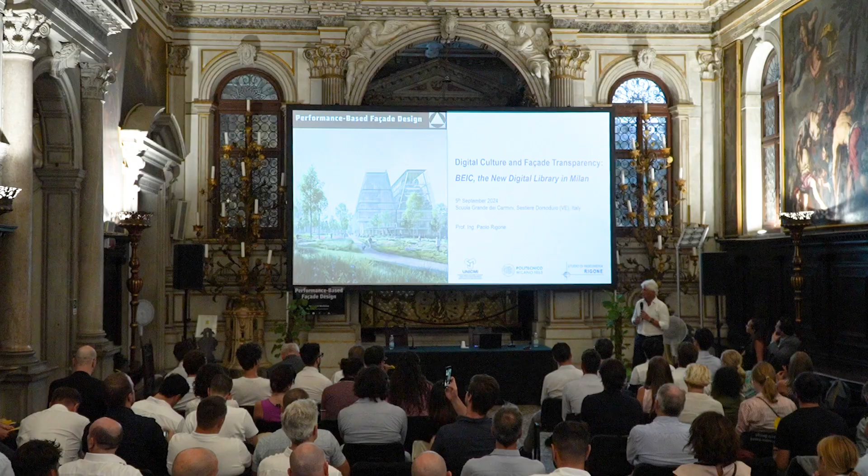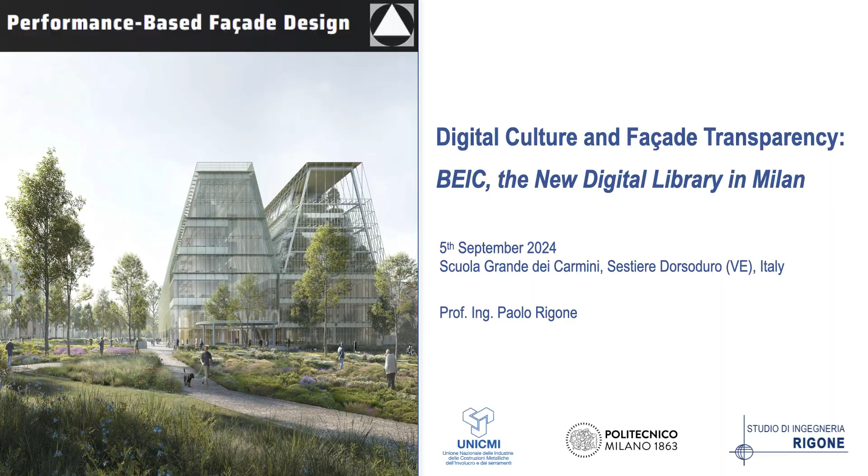My presentation deals with a new project in Milano, but I will not present it directly through the architecture, just more regarding the engineering approach. The general concept is, again, transparency. Transparency means many things in terms of architecture, of feeling the architecture, but from an engineering point of view of the facade, transparency is normally quite a big complication in the design. So we will see some issues.

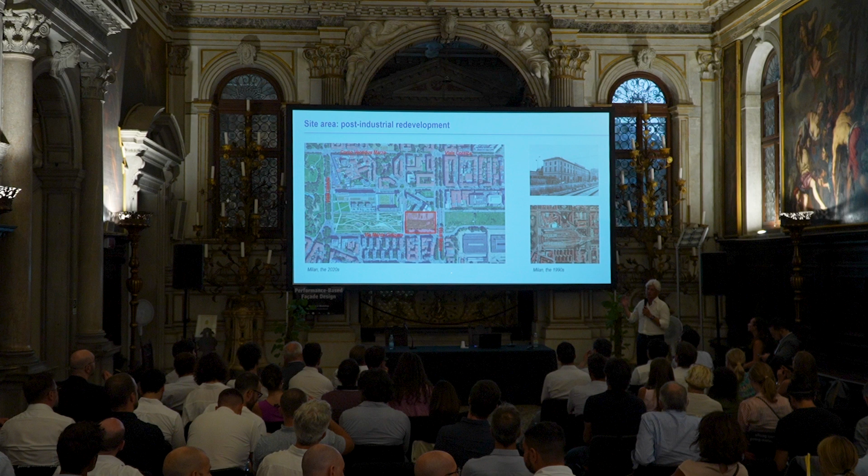So, very fast, the introduction of this new building. As you have seen, it is a new library, the new European library in Milano dealing with information and culture. The building is currently under construction, and it is placed in an area of Milano under refurbishment, one of the most important large areas of Milano, considering that in this area there was before a historical railway station, as you can see from the picture.

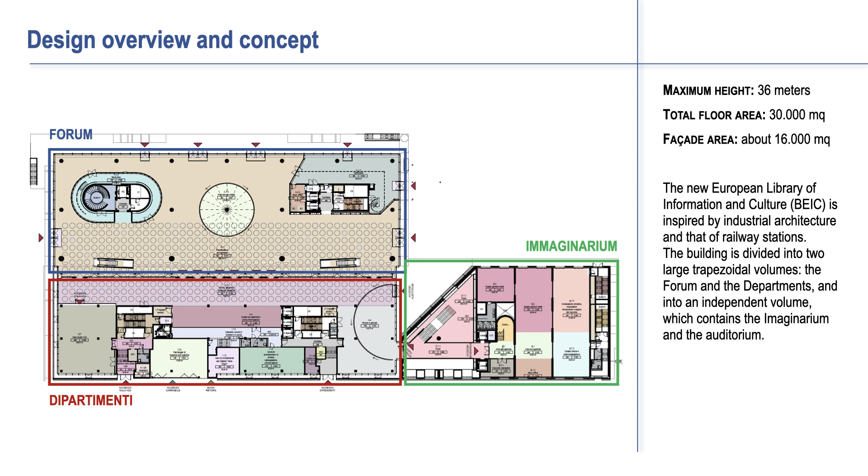So very quickly, this is the plan of the building. You see that it's divided into different parts or components, like departments, the forum area and the imaginarium area, which is mainly at the ground floor. Underground there is the largest part of the building, which is dedicated to storing most of the library information and books.

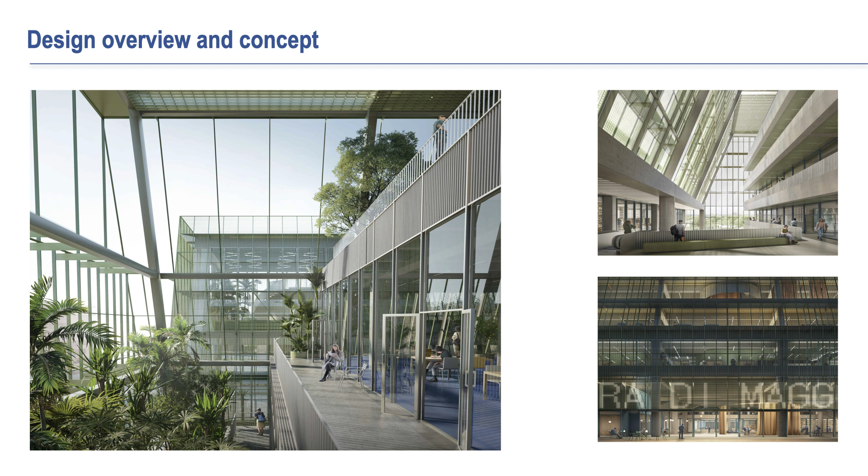This is a rendering of the aim of the transparency of the building. As you see, the building is highlighting the transparency, which is concerned with information and culture, something which sounds like transparency of the knowledge that we can have through the library. As you can see from the rendering, transparency means a very light construction, the structure, but a very light facade too. So mainly glass everywhere, dealing not only with the facade directly, but also with the roof.

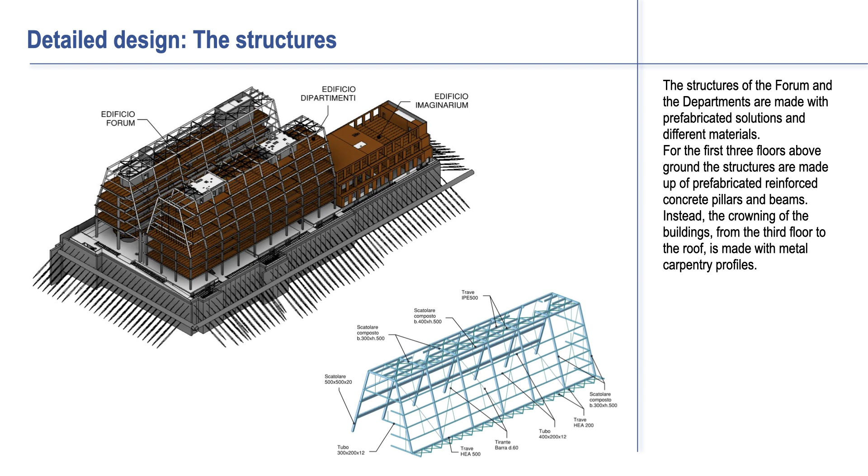This is something dealing with the structure. I will not go through the structure, but only explain the complexity of matching the facade construction with the structure of the building. The structure of the building is a mixture of a concrete structure, which is mainly underground, and a typical steel structure on the ground floor and the top of the building. As you see here from the picture, the spanning of the structure is quite complex and very high.

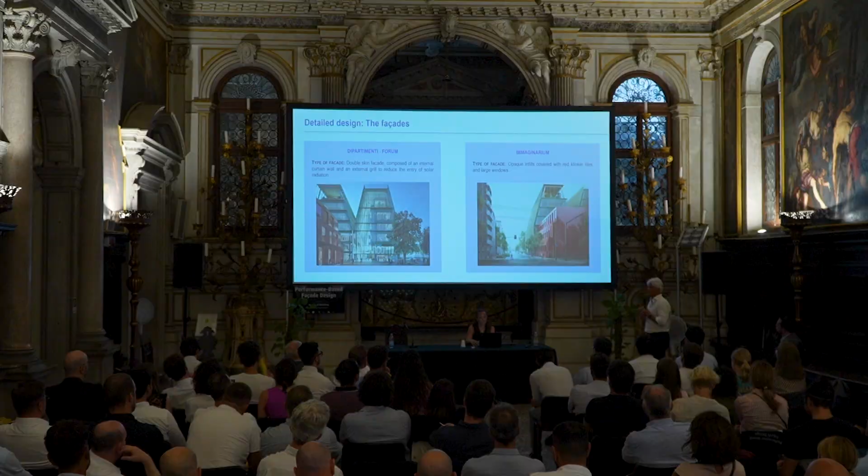So we have to match the facade structure with the building structure. That is a problem which regards the detailed design developed by the architect, by the consultant, and also what is under construction. Today, within the audience, there are a couple of colleagues working directly on this project, on the side of the construction detail design. So we move from the architectural approach directly to the curtain walling construction.

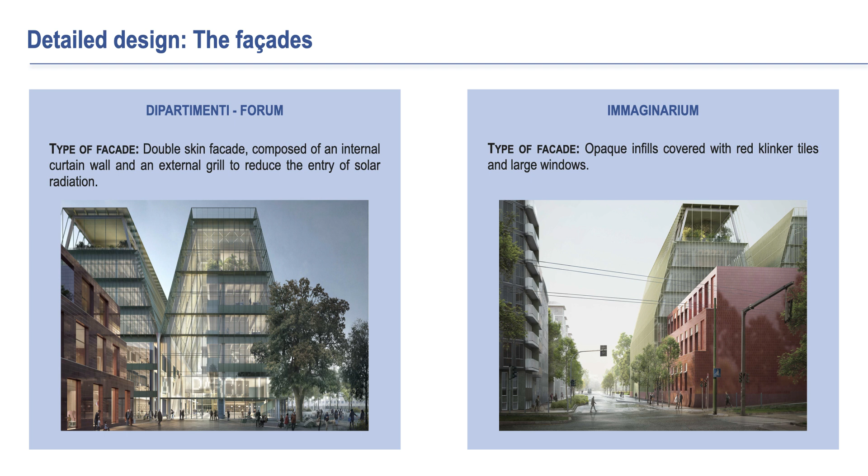In this case, the building is designed with double skin facades, not everywhere, but mainly on the fronts of the building. The system studied in the detailed design is a typical stick system approach, connected mainly to a steel structure. Here you see some very short details about the facade system. It is a typical double skin facade with a metal deck in the middle for maintenance access. And then we have an outer screen, made mainly of grill panels that provide shade to the very high transparent facade behind.

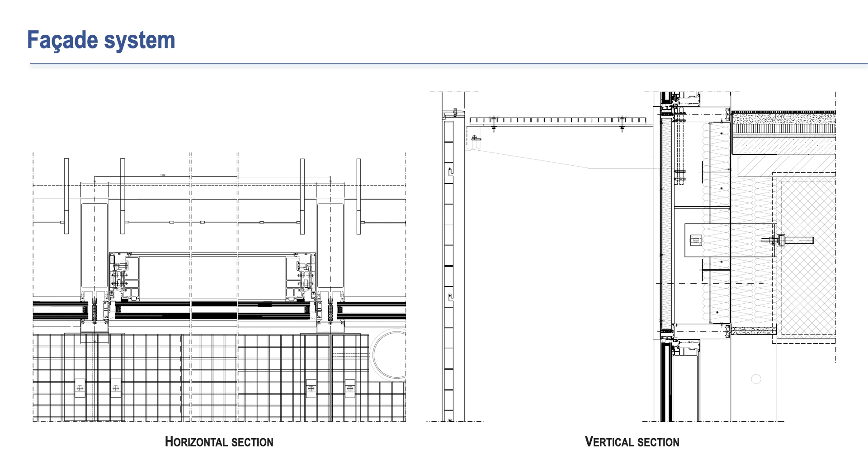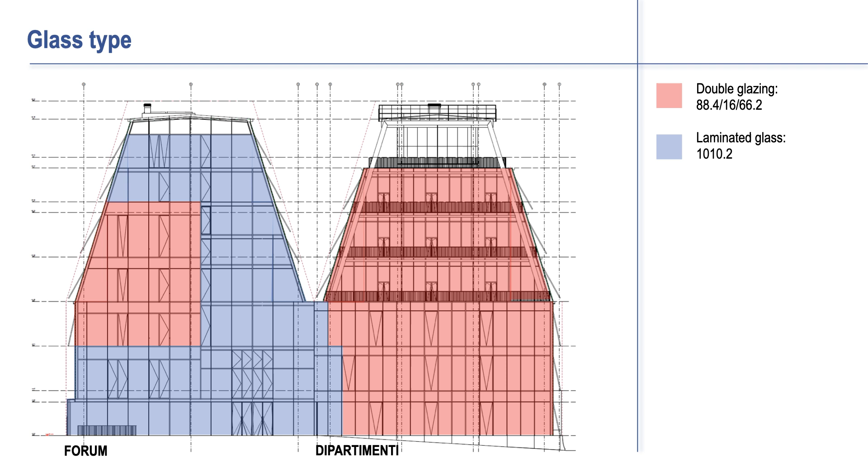Where is the problem regarding this building? It is the problem of the compatibility between the structure and the facade. At the beginning, it could seem nothing very complicated because we are speaking about a stick system, something very well known. Maybe we can go to the next one. And we know that we have performances, nevertheless, that must be assured. We speak about energy performance, acoustic performance, but particularly environmental performances, in terms of air permeability, water tightness, safety in use.

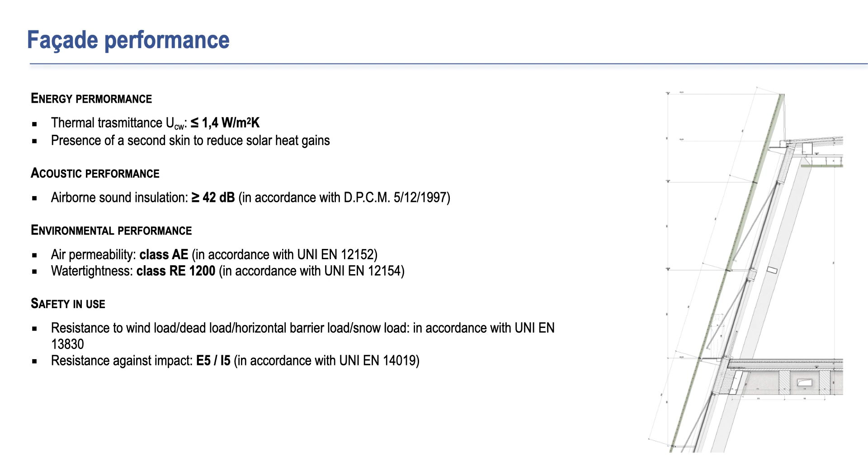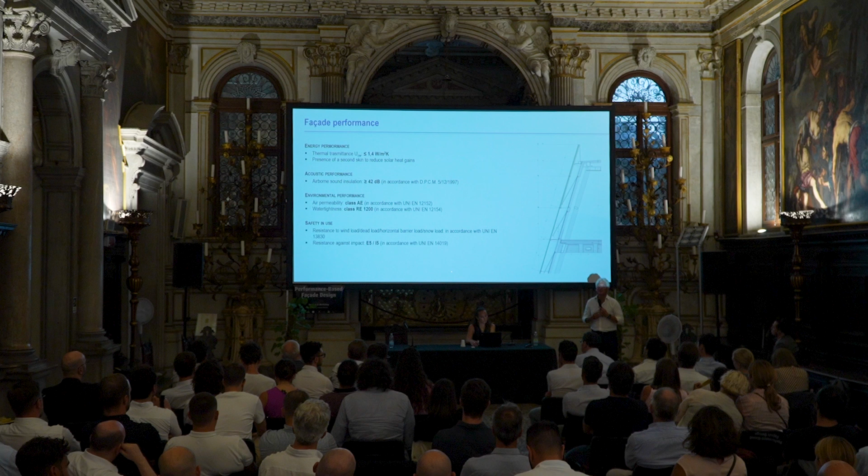And everything is connected to standards at the end. So due to the fact that we, of course, overall work in the European markets, we have some standards, and the leading standard is the product standard EN 13830, which is, let's say, our master standard regarding facades.

So what are the problems with these projects? We have a geometry of the facade. As you have seen, the facade is inclined. So the first question is: is it still a facade or something which is becoming a roof? Well, if we look at the product standard for facades, it stops at 15 degrees of inclination. So everything which is sloping more than 15 is no longer a facade.

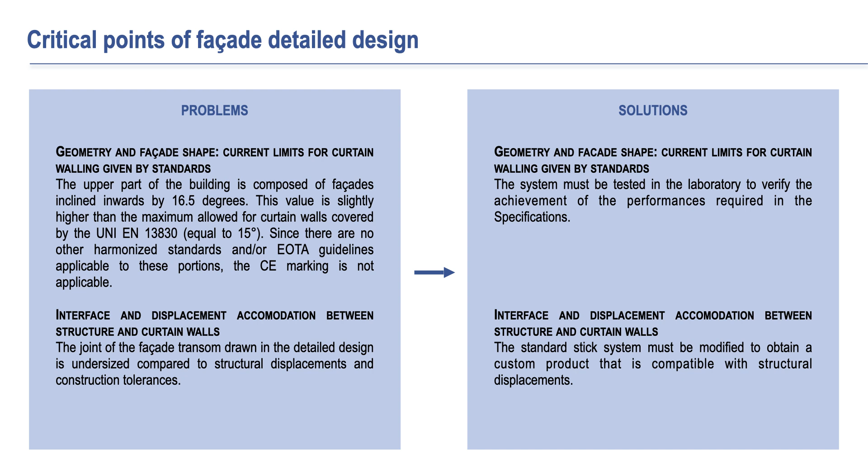But nevertheless, we have the same construction system for the facade from the vertical to the sloped area. So normally there is a problem regarding Europe for the CE marking of the product, which comes out of the application of the standard directly. But nevertheless, we have, let's say, performances that need to be assessed by the facade. And the other topic is the interface that we have between the structure and the facade itself.

So here you see just the approach given to the project. It started from basically a commercial system for the facade, a stick system that we generally know very well. We know that for stick systems, and also for other kinds of facades, we have some geometries that must be respected. Particularly, as you see on the top left, we have the glass bite. The glass bite is something which is dominant in terms of the performance of the facade.

But what we have here in this case, as you see on the right side, are large construction tolerances and displacements. So what is the risk when we move from the approach that we have on the left to find exactly the solution? Normally the risk is that we have no more allowance between the structure of the facade, the glass units, and what is expected as interference with the structural deflections or displacements of the building.

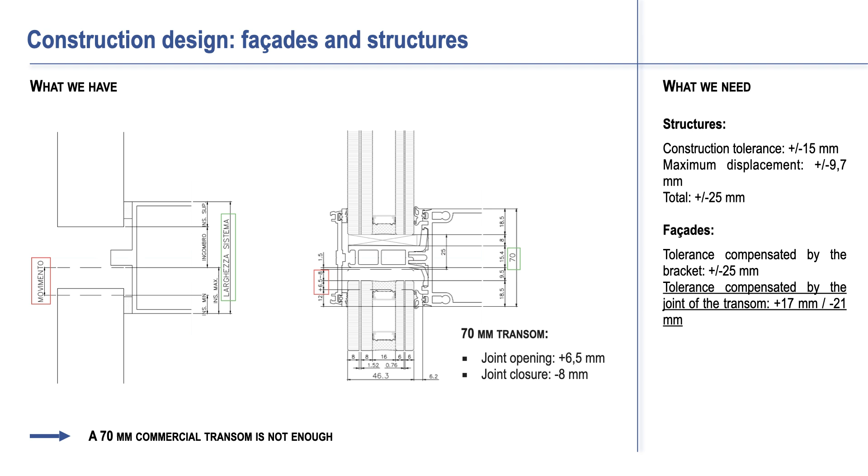So this is a typical problem which normally comes out when we look so much to transparency, so large glass units, and we also look for a very, very light structure. So of course, this is what we have on the right side. That is the typical approach that we have to the problem.

And we know that standards are able to define displacements expected, not for the structure, but for the facade frame in terms of wind load resistance or horizontal live loads. We know that we have standards able to fix displacement limits that are given to assure that the facade is able to maintain performances like air permeability and water tightness under serviceability.

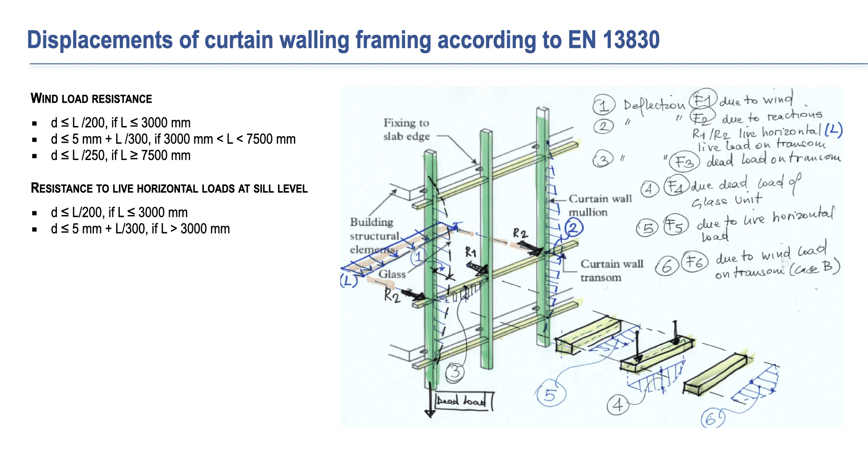But as we said, here we are moving from a typical standard system to something which is customized, even if the original idea is to move from a system selected on the basis of commercial data, because of course the project also needs to answer to a cost limit due to the fact that this is a public building. So what it means in terms of construction is that we have a standard stick system with a dominant system width, and we have to move to something different, a system which is able to allow the different displacement between the structure and the glass units. And this is what we see on the right.

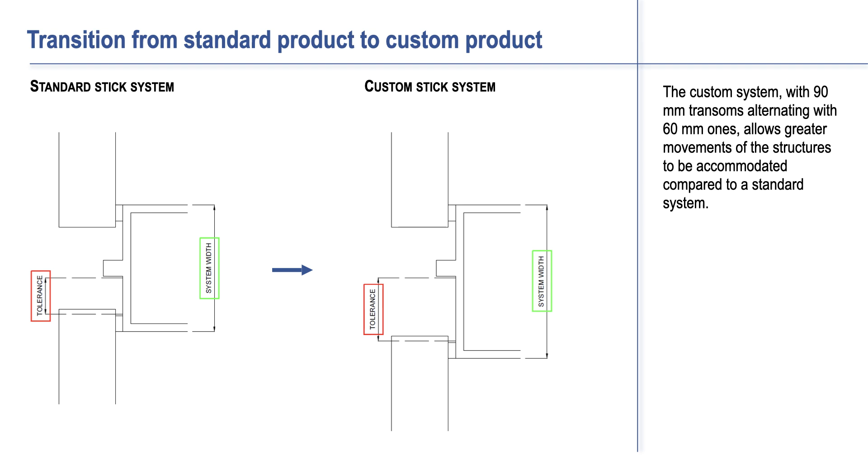So of course I cannot present you everything because the project is under development, but just to explain to you the passage from what is in the original design to what is in the construction, as you see here.

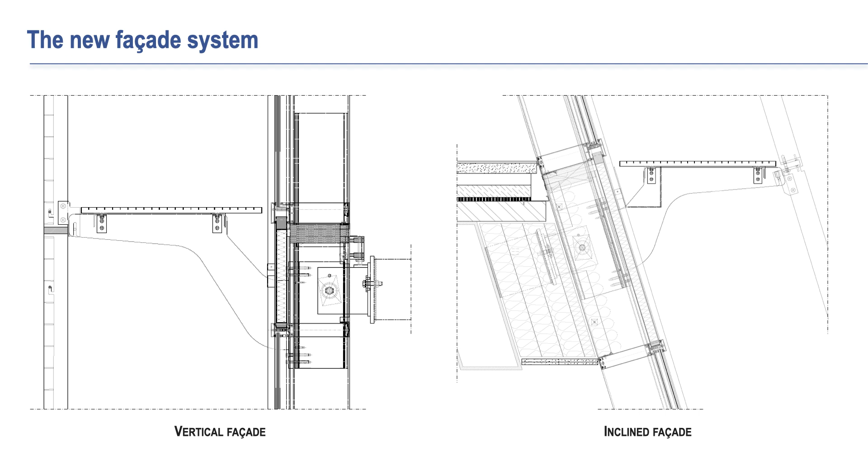What is the difficulty here that we also need to carry? It is the passage from the vertical facade to the inclined one. Because again, all the performance tests that we can have with a stick system which is already certified are valid for the CE marking only on the vertical, up to 15 degrees. So in this case we also have situations where we have to test the inclined conditions, like the one you see on the right.

Okay, so just coming by train this morning, well, I thought, why do I only have to speak about the stick system? So is the compatibility between structure and facade only a problem of the stick system in the facade industry, or is it generally something which is coming out from the approach that we give to architecture currently?

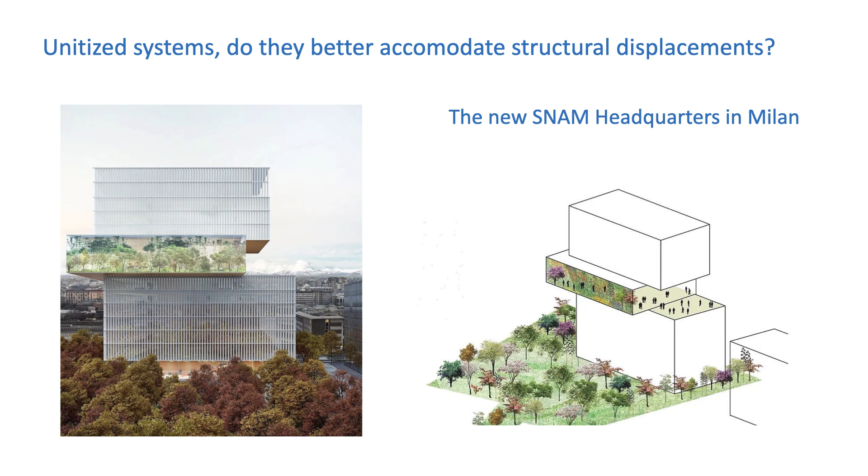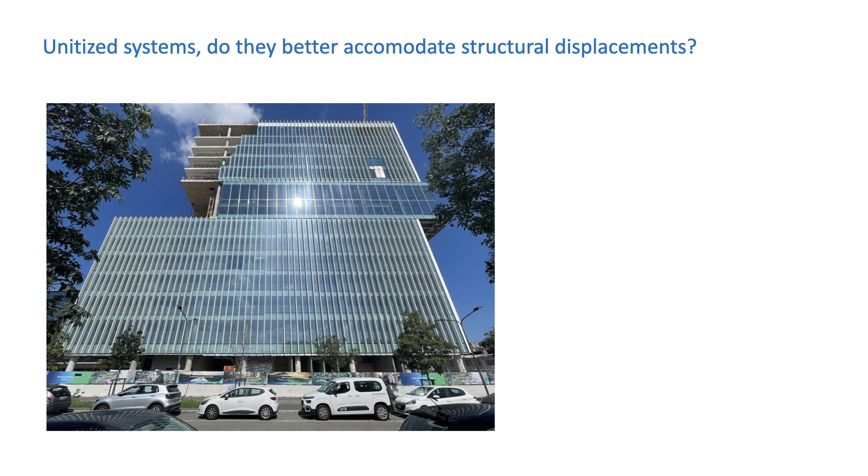So this is another project in Milano, which is currently under development or mostly completed for, let's say, the facade. But again, you see that the discussion here is the very challenging structure that we have with overhanging parts. These overhanging parts mean that we have different displacements according to the different floors. The building is mainly made of, let's say, a unitized system in this case, except for the central part of the elevation you see here. In that case, it's a stick system.

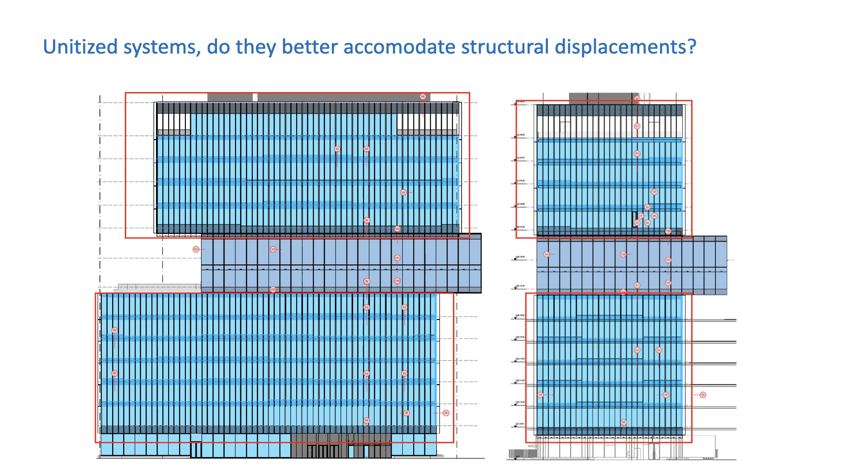What is typical of this building is that the structure is challenging because we have cantilevered parts, and there is a post-tension system for the structure. So we expect from the structure a large vertical displacement, particularly for the shrinkage of the structure, which is made of concrete. So I have highlighted the different parts: lower floors or lower slabs and high-rise slabs.

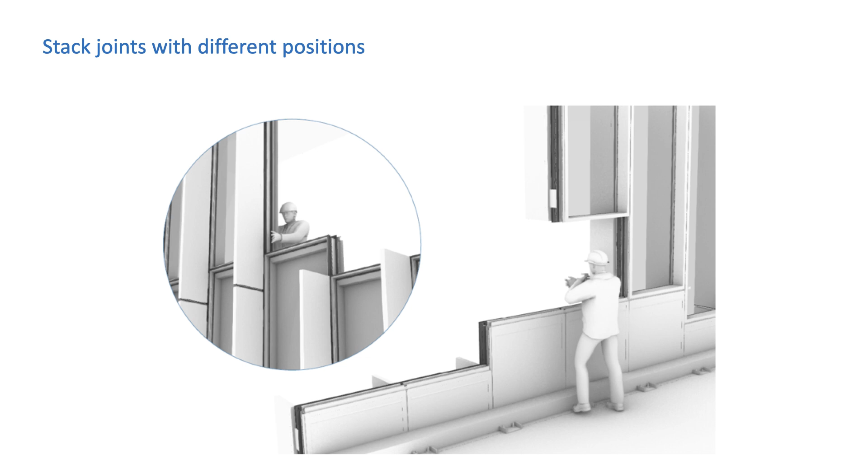We know that the system in this case, as I said, is a unitized one. So what is typical in the unitized? It is the stack joint. This is an example taken from the building during the installation phases. The building is particular because the stack joint is not at the floor level, but at the level of the sill. And the sill varies from floor to floor, from 45 centimeters up to 90 centimeters above the floor level.

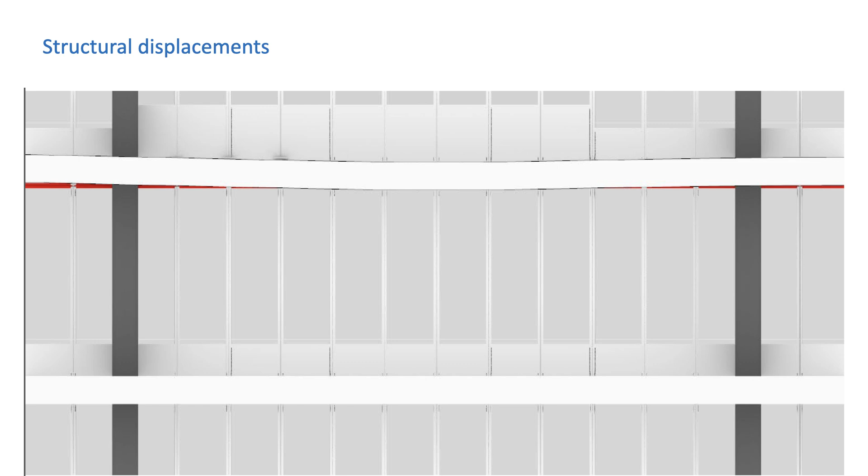So what is the problem here? Again, the structural displacement. Going on to the next slide, we have simulated the expected structural displacements, mainly given by dead load and, as I said, by creep. So here the problem is to have two different stack joints according to the different floors. In the lower floors we have more or less a very standard stack joint for the unitized system, about 23 millimeters, to allow all the different displacements of the structure.

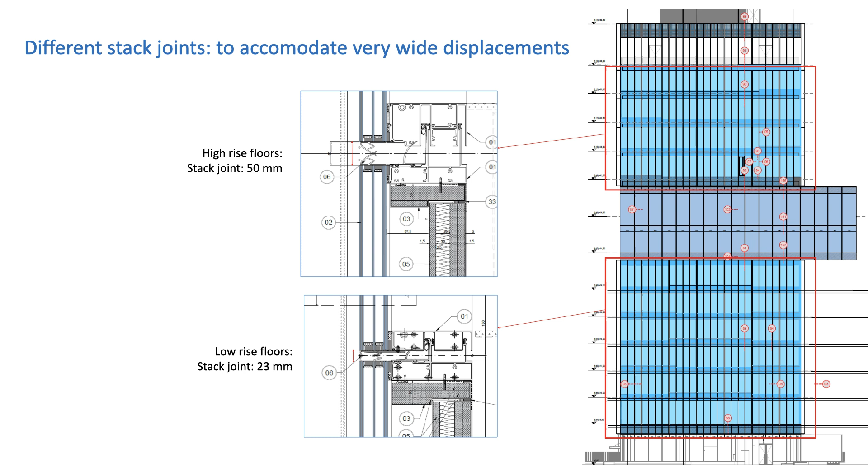In the high-rise floors, we have something which is quite unusual: 50 millimeters of stack joints to accommodate the displacement of the structure. So again, this means that we go a little bit outside the standard. Therefore, for this building as for the other one, there is the necessity and the opportunity to test different situations, to be able to accommodate displacements and assure performance.

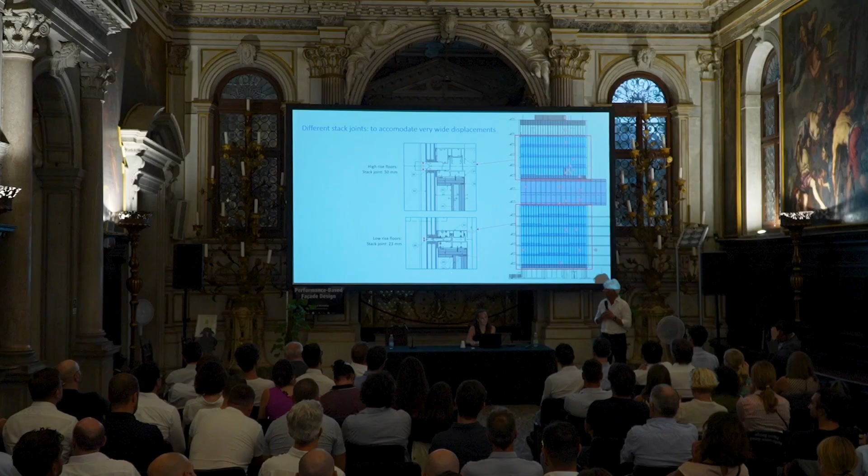So, coming to the conclusions of my presentation. My idea is that, of course, we have to fix standards. I work a lot in standards, as you know, but standards are not able to catch everything, even if they run after the development of architecture and industry. It is therefore very important to have clearly different stages of design, from the concept to the construction.

Also, testing is nevertheless very important. Testing because even if we are able to certify standard systems, the certifications cannot be extended to all the different cases. So we have to test what we design, particularly when we design something which is mainly customized. The last topic is that I see the complexity coming out very much in the integration between the structure and the facade design.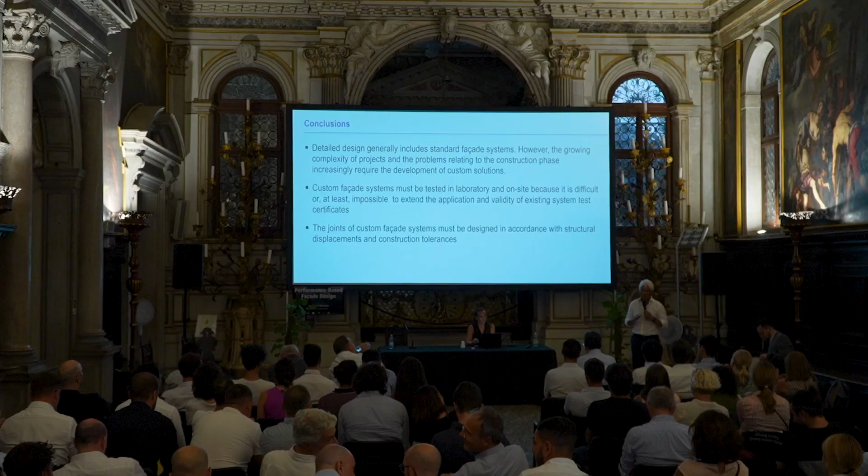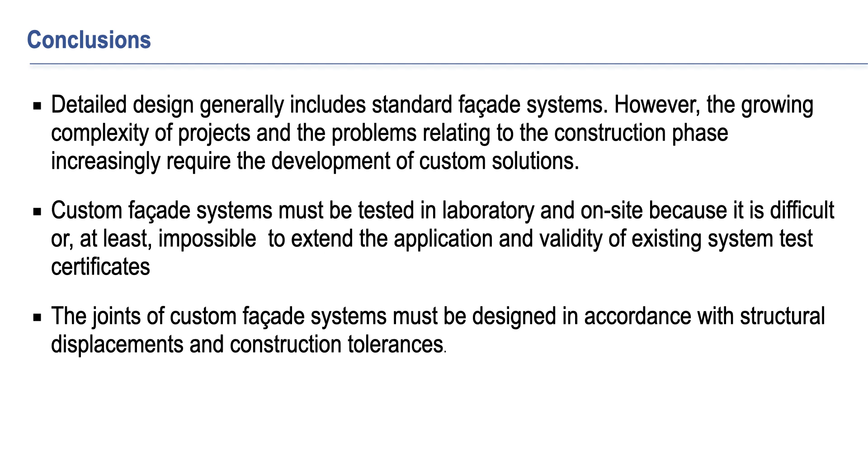As I said before, we have standards dealing with displacement according to the performance of the facade, but we do not have clear displacements in our standards regarding structure, when these structures are connected to very sophisticated envelope systems like curtain walling. So regarding the last bullet, one of the next steps in standardization activity could be to work much more jointly with structural engineers, finding a good way to fix structural displacements according to the different technologies we can adopt for the building envelope, particularly curtain walling.